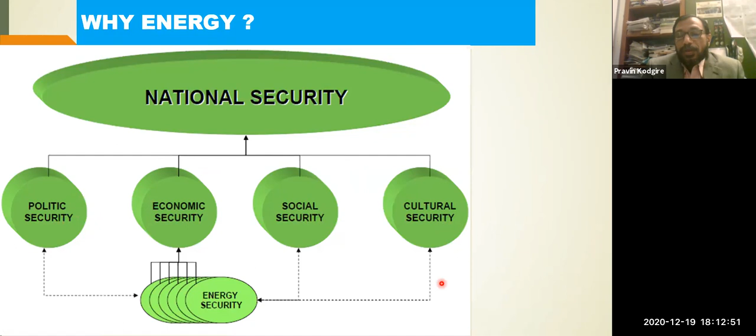We all know there is a need for energy. As engineers, we have already studied that without energy, any daily activity or instrumental activity cannot function - energy plays a crucial role, not just for the individual but in a broad sense. Today, most of us are aware that the Honorable Prime Minister is emphasizing national energy security. Energy plays a vital role in accommodating several aspects like political security, economic security, social security, and cultural security - these are all integrated or interrelated with energy security. In another sense, energy security is an indicator of Atmanirbharta or Atmanirbhar Bharat, which has been emphasized and proclaimed by the Honorable Prime Minister.

Along with that, positive progressive growth for the betterment of the nation as well as the globe, self-sustenance, self-reliance, and more importantly, sustainable development. I'm sure we all are aware what sustainable development indicates. We need to think about progress, and at the same time, we need to think about mother nature as well.

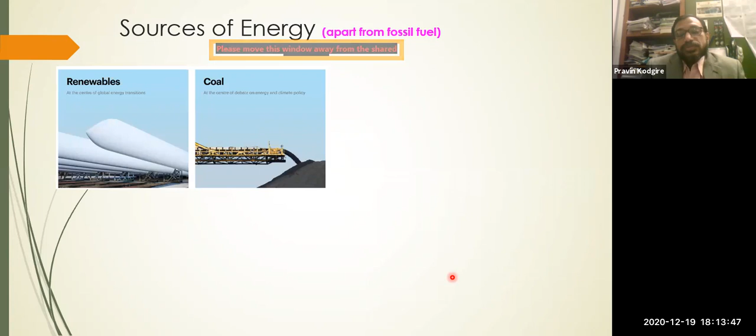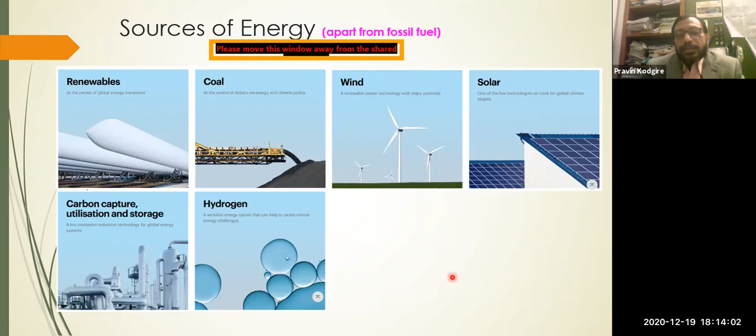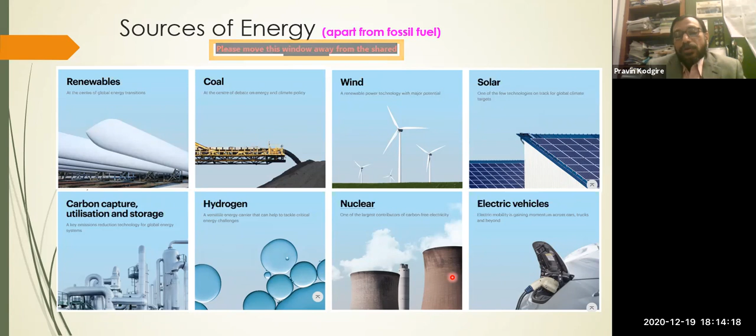Now let's look into what are the sources of energy. This is not a very new thing, but we are all aware. Here I'm focusing on the different components of energy other than fossil fuel, which is presumably considered an integral part also. Renewables, coal, wind, solar are the upcoming components. Then utilizing fractions like hydrogen, some new components of energy as well as old components, through which we basically take care of our energy needs and requirements.

Now, having understood the different sources, let's look at the current global trend and scenario in terms of energy. This gives a schematic representation from 1950 through the decades, showing how the energy scenario in terms of sources has varied. By and large we know petrol was discovered since the 50s. Prior to 1950s, coal was the major prominent source of energy, and industrialization was not so much there. But after World War II, a lot of industrialization took place, and a lot of research went into different fields, and different sources of energy came into the market.

If you look into the projection, because some projections are important down the line to the topic I'm going to present - the coal is prominent, but after 2020, by 2030, it's probably going to decline a little. But prominently, oil and biofuels at the bottom are more or less stabilized. Here I'm focusing on both oils, that is petroleum based, and renewable fuels in liquid form. And if you see here, the global energy demand is increasing, which we all know.

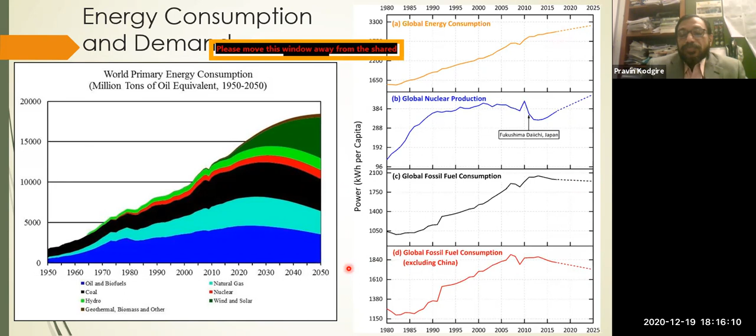The population is increasing, living standards are increasing, and the need for energy is increasing day by day. However, some components are playing a declining role in terms of their availability and utilization for future growth demands and requirements. Nonetheless, the energy sourced typically from coal or natural gas or fossil fuels doesn't come at a cheaper cost - it comes with a certain price. What is that price today?

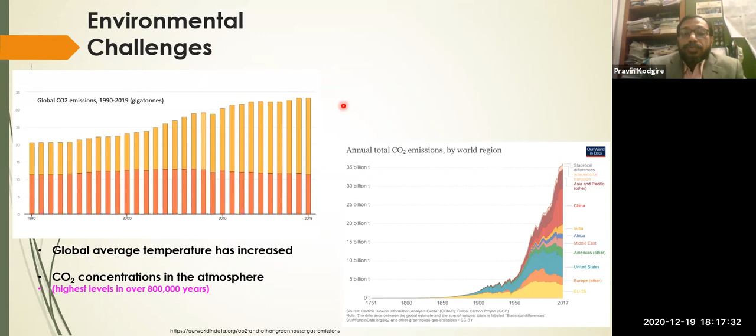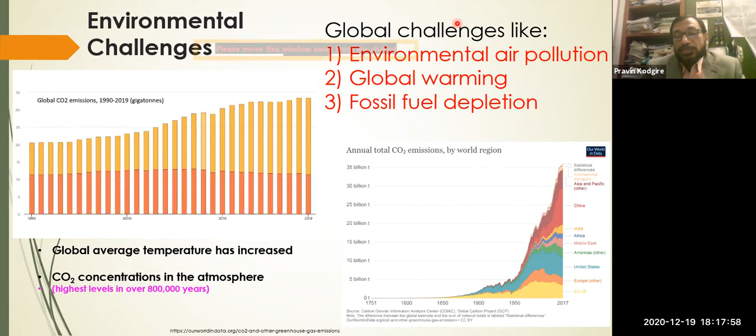Those of you residing in Delhi are more aware of the pollution you are going through. The CO2 emission or concentration is the topmost over the last 8 lakh years. Just imagine what kind of activities and environmental challenges we are putting forefront. This brings us to certain buzzwords everyone is talking about today - challenges like air pollution, global warming, fossil fuel depletion, and so on. We cannot overlook these challenges if we talk about sustainability, and we need to come up with concrete solutions if we want to sustain and survive in the future.

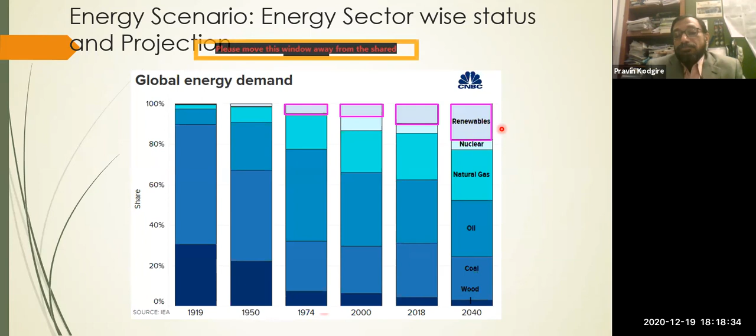Nonetheless, the quantum of energy requirement cannot be completely fulfilled by renewables, but still they are the potential players to take care of the sustainable growth point of view.

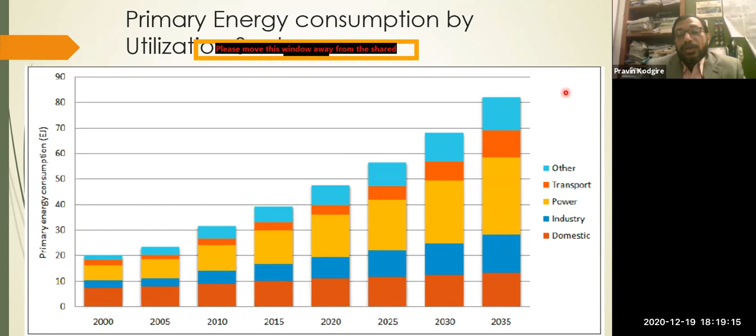So from that perspective, and in order to take care of the challenges which I specified, what is the motivation for going ahead with this theme? What are the motivations to think about this from the sustainable development or sustainable growth point of view?

We are all aware that in 2015 there was a major milestone where almost 198 countries across the globe met in Paris, and during that conference they took an oath that they are going to decrease carbon emissions by whatever means responsible.

Apart from that, with all these updated informations, the Government of India is also not running behind. They are also on the forefront and have come up with a policy about sustainable fuels or green fuels, which can be affordable and can take care of the environmental concerns and challenges.

Furthermore, as I specified in some of the previous slides, for the growth of the nation, transport or diesel consumption plays a very important role. And generally today we are getting most of our diesel from petroleum based sources.

As I already mentioned, it is projected that by 2050 most of the petroleum reserves are going to get depleted and come to a certain saturation level. Looking into the environmental concern point of view, they may not be prominently available for common people. So we need to look for something else which can cater to the common man's requirements and needs.

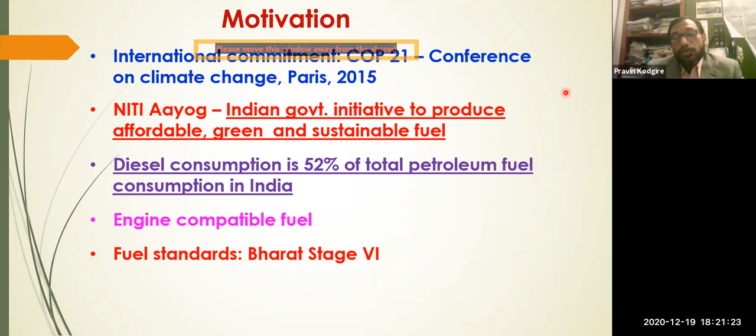In view of the global challenges we just discussed, stringent norms are being set by statutory bodies as well as government. Recently in April 2020, instead of only Bharat 4 kind of fuel specifications, we jumped to Bharat 6 stage fuels. As many of us are aware, the critical point is most parameters are the same as Bharat 4 fuel quality, but one important criterion is the sulfur content should be 10 ppm.

Being engineers, we know that to come down from a certain equilibrium to a lower equilibrium, a lot of engineering has to be done in existing systems in order to maintain specific standards and qualities. So this is also parallelly a challenge which needs to be taken care of, and for this perspective we need to look for an alternative. Is there any alternative available?

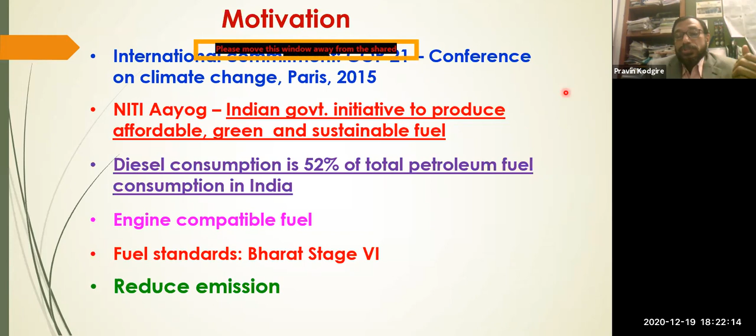Of course, reduction of emission is another motivation. So is there any alternative or solution available for these motivations or for the previous challenges? Yes, biofuel is one of the important motivations addressing all these aspects.

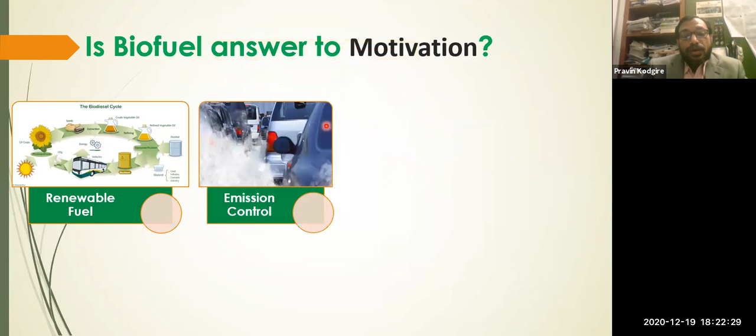Why? It is a renewable fuel. Also, it controls the emission. There are studies that show if you use petrol diesel versus biofuel - I'll specify more specifically biodiesel - there will be at least 30% less emission from the same amount of fuel burned.

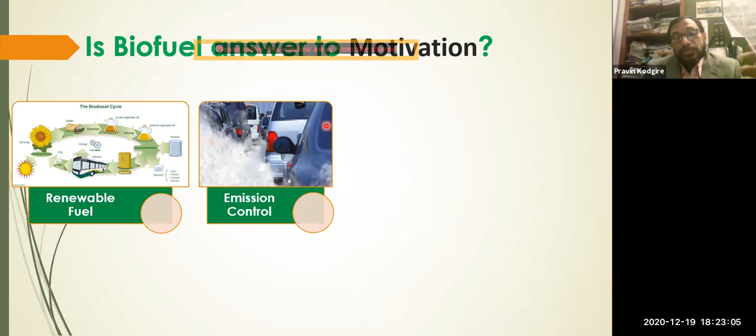Just imagine, with petrol diesel, when it gets burned and the CO2 leaves into the atmosphere, that is an open cycle - CO2 will not be captured back. Whereas with renewable biodiesel, if you burn it, the CO2 that is released will be captured back in the carbon cycle or CO2 cycle, and the overall impact on the environment can be substantially or significantly reduced.

More or less, this will lead us to energy security, and as I said, the fuel is very much compatible with existing engines up to a certain composition blended with petroleum diesel. That makes biodiesel one of the important, prominent candidates.

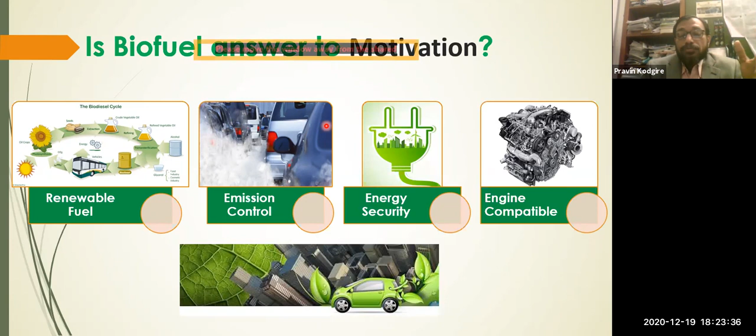Let's look into a few more facts. I won't take much time on these, I'll jump to the other topics. But these are some statistics that as Indians we should be very much aware of.

We are the fourth largest petroleum consumers, fifth largest primary energy consumers in the world, and sixth in energy demand, which is basically increasing.

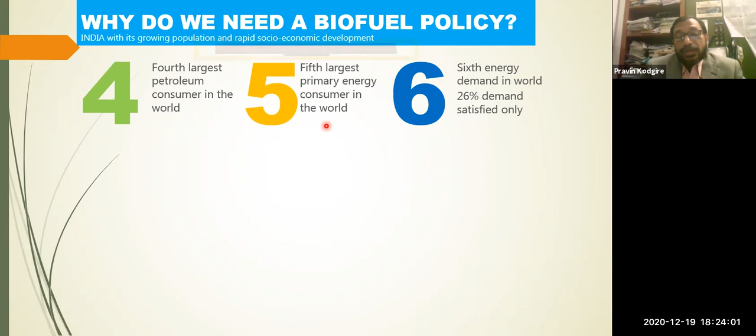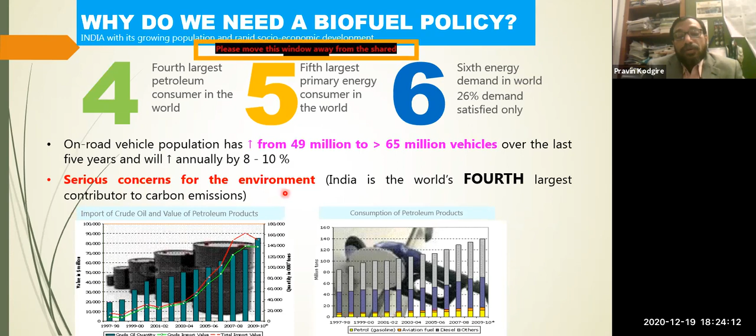As already specified, demand is increasing and we need to take into account the environmental concerns, come up with policy, and I'll touch upon some aspects to give youngsters an idea why there is tremendous potential for the biodiesel sector.

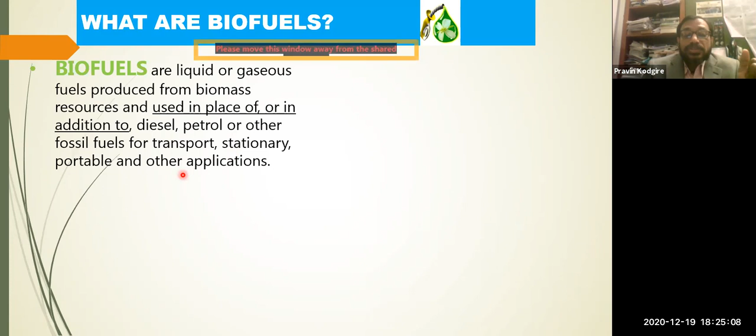So when we talk about biofuels, they can be either liquid or gaseous. Bio means plant derived, natural or renewable based. They can be used 100%, or blended with diesel or petrol, for transportation as well as stationary sets, gen sets, or other domestic or industrial applications. That's how broadly biofuels are designed.

There is a lot of research going on. Based on the type of resource used, they can be divided into first generation biofuels, called bioalcohols and biodiesel, mostly derived from vegetables or things people consume. I'll touch upon some problems associated with that.

Typically in countries like India, we have a huge population, and current agricultural production of vegetable based oils is insufficient for the people themselves. So if you go for this option, it will create a food security problem. Only developed nations like Europe, USA, Canada focus on first generation, but they are now also switching to second or third generation biofuels.

Second generation uses non-edible fuel feedstocks, and the fuels obtained from them are called second generation. Third generation is where a lot of research across the globe is going on, targeting microorganisms like algae, which contain huge amounts of fatty acid base, and can be converted into not just biodiesels but a variety of biofuels - this point will get clearer.

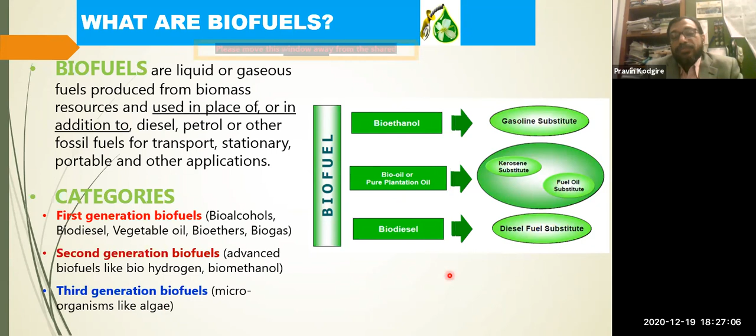When we talk about biofuel, it comprises three different components - I'll focus on this a bit more. Bioethanol is compatible with petrol, bio oils are compatible with aviation fuels or plantation oils like fuel oils or FCO, whereas biodiesel is more compatible with petrol diesel. That's how briefly one can get an idea of what biofuel means.

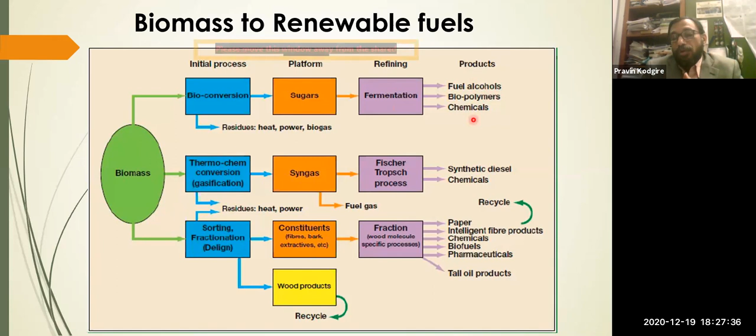Now there are different sources - each requires thorough knowledge. But briefly, there is a bioconversion route, a thermochemical conversion route that is gasification, and fractionation routes, from which by adopting different intermediate chemical transformation stages, you can get a variety of products for our daily needs.

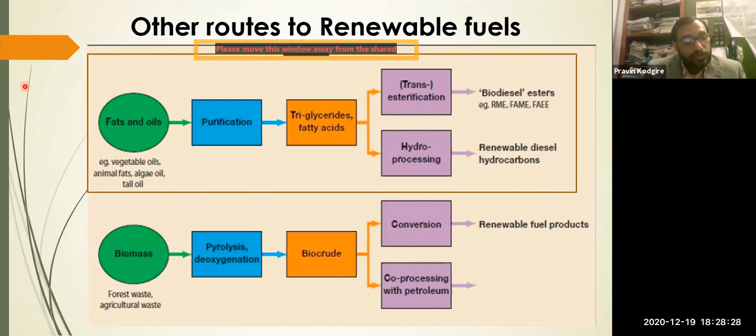There are many other routes shown here giving different types of feedstock renewable fuels, as discussed in the previous slide - that is what biodiesel or biofuels generally refer to. As I said, this will be the focus.

Now I'll quickly run through why this is important. If you look at statistics, by 2016 there was a $100 billion market, and in 2023 it is going to rise to $132 billion, and within another 5 years it is going to reach $150 to $160 billion.

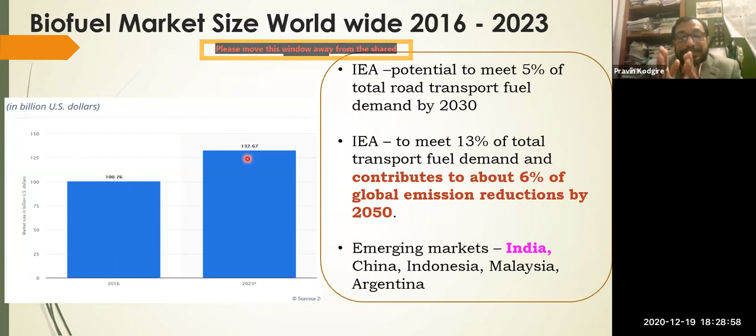Just imagine, it is gaining tremendous importance in the global arena. Why am I focusing on this? Because India's population, India's potential, India's standing in the world is going to be significant in terms of consumption as well as tackling the challenges. A lot of research is going on in this domain in India, which is at par with global standards in terms of providing solutions to energy sustainability and energy security, because India is going to play a major role.

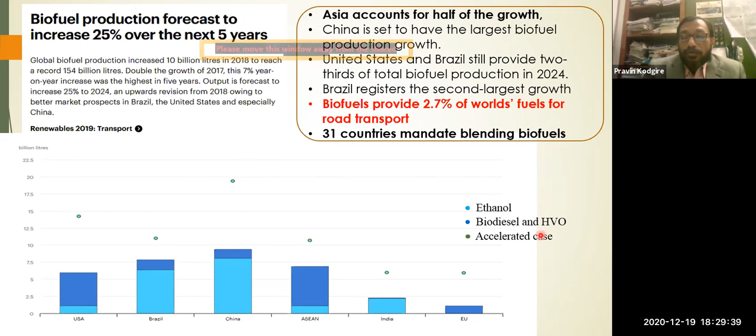That's how you can look into these numbers for the different types of biofuels which I specified. As I already said, the government came up with the policy. I won't get into many more details, but certain current issues can also be addressed, where the farmer community or agriculture community can also be benefited. The policy was initiated in 2003 but revised in 2009, 2011, and recently 2018 and 2019.

As part of 2019, it has now been made mandatory that petrol and diesel should have some fractions of bioethanol and biodiesel respectively. By 2030, the government is planning that diesel and petrol sold at fuel stations will contain 10% biodiesel blending. Now just imagine, even if we consume different feedstocks and convert them all into biodiesel...

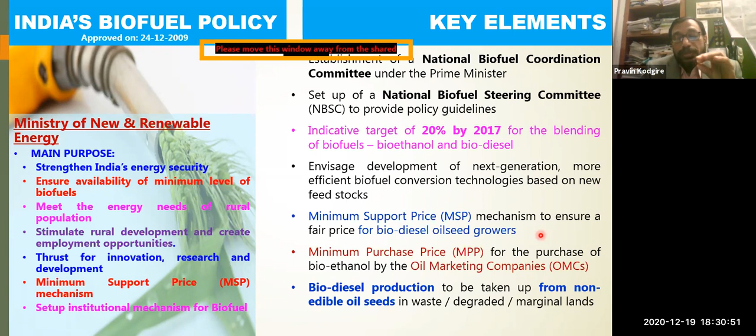India today is only able to produce 0.14% of the biodiesel blending that's possible. So to reach the target of 10%, there is plenty of opportunity available for youngsters in terms of entrepreneurship, research, and coming up with new ways to produce biodiesel.

So as I said, the policy is devised in a way that benefits these different people. If you just see, every section of the society, may it be local, national, or global, is going to get benefited. May it be industry, individuals, agricultural community, administrators, everyone is going to basically get benefited. That is the important idea.

Is there any issue? So everything is fine. Go ahead, sir, nothing wrong. Yes, Dr. Pravin, it's going good.

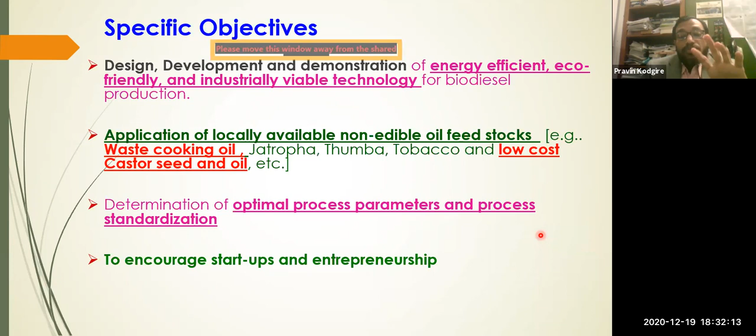So I'm going to just brief you a little bit on what we are doing in India to take care of this particular field, and what kind of activities we are doing in my university. These are the broad areas: we are designing, developing, and even demonstrating energy efficient, eco-friendly, industrially viable technologies for biodiesel production. Our focus, as already specified, is on non-edible feedstocks. In subsequent slides I'll talk about the limitations with first generation biofuels.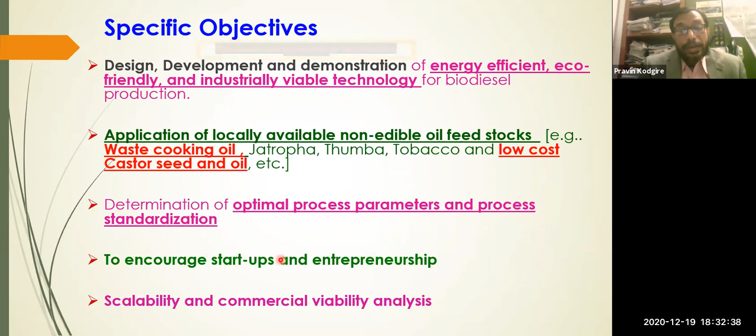Of course, when you talk about engineers, we need to do optimization of a process and process standardization. So those activities we do, and as part of the center, we come up with new ideas and train students for entrepreneurship activities. With that, let me get into the technicality of the topic.

So when I spoke about biodiesel, what kind of raw materials go into it? When you talk about biodiesels, what I require is either oils or seeds. They can be edible or non-edible, but here I have focused more on non-edible. Then there is another chemical required, that is alcohol, and one more important entity required is a catalyst.

Now let's first look into the feedstocks. These are the different feedstocks, but as I said, in India we are not focusing much on these. Most developed countries - Europe, USA, Canada, and to an extent Malaysia because they have a lot of palm oil - are focusing on edible sources. Whereas in India, these are the non-edible sources which I have focused on here.

Apart from these, these are just representative ones. There are many more situations, geographical location wise, where specific non-edible feedstocks are available. Those are basically targeted, and along with that, with the recent policy by 2018, the waste cooking oil which is generated across domestic applications as well as industrial applications can also be utilized for production of biodiesel.

So there is plenty of opportunity for something which we call today as waste, and from that waste to bring out a value addition, waste to wealth. Now this is a bit of an alien word typically, if I understand most of you are mechanical engineers, but don't get disturbed - this is basically a transesterification reaction chemistry, which I spoke about earlier, how biodiesel basically reacts.

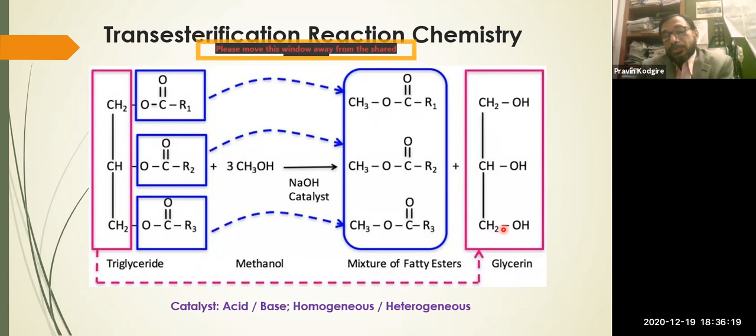And another important byproduct - many of us are using most of the cosmetic products - this glycerin plays a very important role, and it can add on the cost for your entire production of biodiesel process, like a side product although it is produced, so it can be sold, and overall a green approach can be adopted for biodiesel production.

Just to get a little more idea, some of these aspects I spoke already. Glycerol we already seen in the previous slide. This is a triglyceride, that also we have seen, but these triglycerides, depending on the different types of seeds, like non-edible seeds I just spoke about - mahua, neem oil seeds, karanja, jatropha, castor, and so forth - they contain different chemical structures.

What chemical structures? If you see, these are the chains, called long carbon chains, maybe 12 carbons, 16 carbons, 20 carbons, 22 carbons likewise, but they are attached to the other end. This is the glycerol end.

But sometimes, depending on the nature of the fluid, many times we hear don't eat too much oily stuff, because it will create cholesterol and health problems and all these things, because they contain some saturates, unsaturates. So what is that thing? These are some little insights - saturate means all the bonds are chemically single bonds.

Monounsaturated means among these single bonds, one of the bonds, the carbon-carbon bond, will have a double bond - that's how this is called unsaturated. And polyunsaturated means many carbon-carbon bonds are multiple bonds, double bonds are there. Generally these types of structures are harmful to our health or our body.

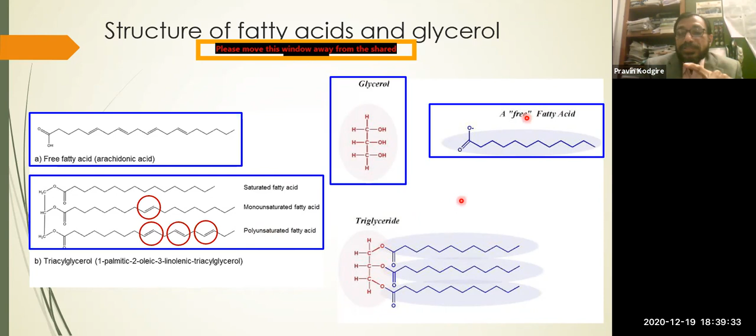As I mentioned, depending on the double bonds present, we have saturated, monounsaturated, unsaturated, and polyunsaturated types of fatty acids. Generally any acid is a combination of these different acids, so the fractions will vary, plus and minus. But this free fatty acid needs to be removed before we go for biodiesel production.

Now, having understood these things, we have to understand what techniques are available for biodiesel production. My specific topic is basically biodiesel production via process intensification. But before getting into process intensification, I would like to explain the conventional way, which is how most biodiesel production takes place today.

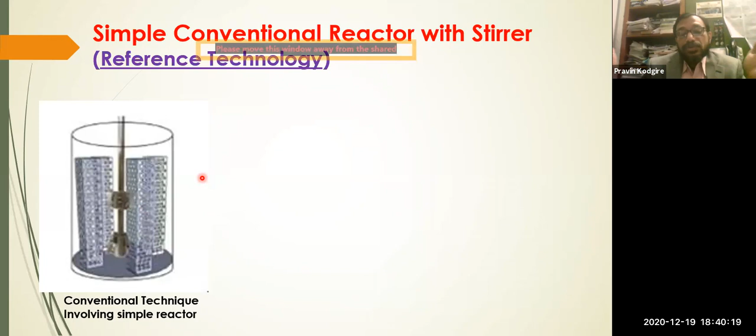This is also called the mechanical stirring method. You take the oil, add the alcohol, add the catalyst, heat it up to a particular temperature, and have a mechanical stirrer rotating at a certain speed. Then over 3 to 4 hours the reaction takes place. That is the general chemistry involved.

But this process has many limitations: higher reaction times, high energy consumption, high catalyst requirement. Once you get the final product, you have to separate biodiesel and glycerol, and a lot of water washing has to be done to get rid of the catalyst, which produces pollution and contamination. Overall, the biodiesel production yield will be relatively less, making this a relatively costly method.

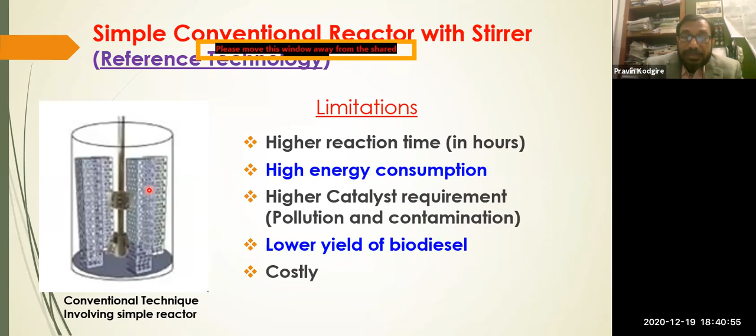So that is one of the basis, or reference, technologies. And here comes the importance of process intensification. What is process intensification? It's about improving the profitability while remaining efficient and competitive. That's process intensification in a nutshell, in just a few words.

This concept is generally studied in heat transfer contexts, where process intensification is more appealed to and understood—by changing different types of flow geometries, or changing tube dimensions and similar parameters, process intensification can be achieved.

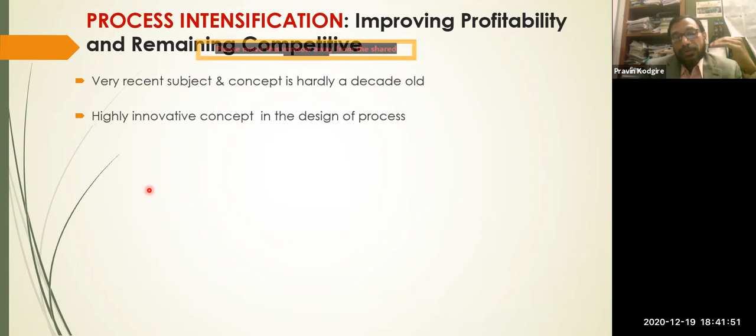Although this concept emerged in the late 20th century, today it is implemented in the chemical engineering area. It started with chemical industries, but now it has entered every field—be it environmental, civil, mechanical, chemical, or electrical. Name any field, and intensification is coming up in full fledged form.

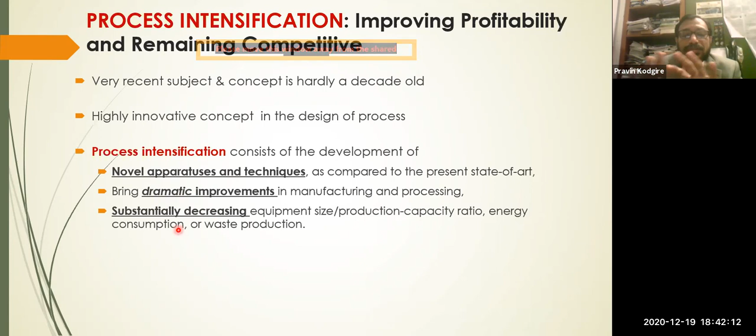So what are the benefits? It's a kind of bringing new apparatus or new techniques, or bringing dramatic improvement at the manufacturing stage, or any design modification. These are the different ways by which we can look into process intensification.

So what we can say is: any engineering development that leads to something substantially smaller, cleaner, and energy efficient. These are the important aspects from a sustainability point of view.

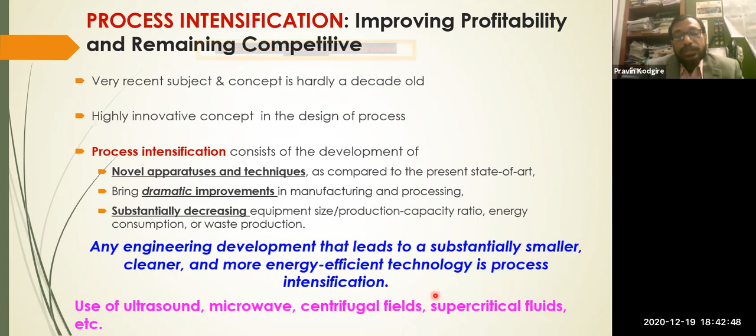That's why these days people are looking for ultrasound techniques, microwave techniques, centrifugal fields, or supercritical fluids, and so on. These are just a few examples relevant to this topic, but there are many more areas where process intensification is taking place.

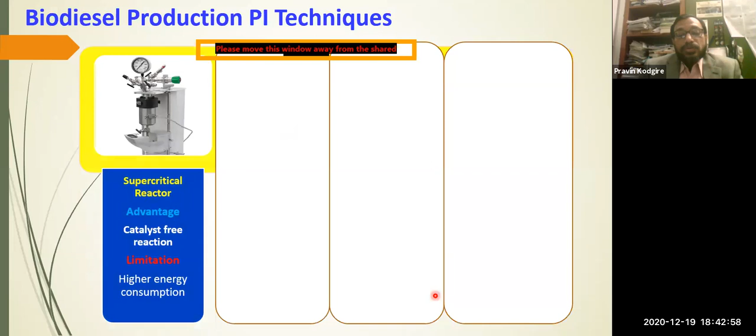Biodiesel is also a field not exempt from this. In the biodiesel area, there are supercritical reactors, ultrasonic intensification reactors, microwave reactors, as well as hydrodynamic cavitation intensification techniques. I've highlighted their advantages and disadvantages, which are not easily addressed by the reference technology, that is, mechanical stirring, which I specified earlier.

Nonetheless, all these individual technologies have their own limitations in terms of high energy consumption. Ultrasonics has heat transfer limitations, microwave has mass transfer limitations, and for certain other approaches, like the in situ approach for biodiesel production, cavitation technologies may not be so useful or important.

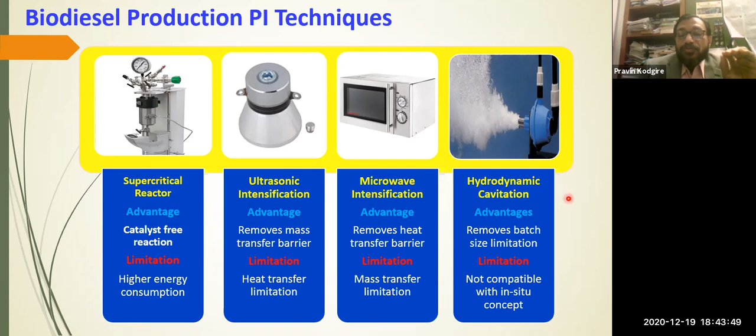So for that, although we have worked extensively on each of these individual techniques, to give a new flavor to each of you, I'm going to talk about a new concept—a hybrid technique. What does hybrid technique mean? If we know the intensification effect and the conversion or yield, we can see how much better a product we get.

So what we want is to be on this quadrant of this particular graph, and this can be achieved by doing hybridization, by putting two techniques together. So my hybrid technology here is a combination of ultrasound and microwave, or a synergic effect, simultaneous effect of microwave and ultrasound.

Previously I showed microwave has a limitation of mass transfer, and ultrasound has a limitation of heat transfer. But if I combine both techniques, I can overcome the individual limitations of each, overcoming mass transfer as well as heat transfer limitations, and increasing product efficiency. That's how I am bringing this process intensification. So where I'm expecting maybe 60-70%, I may expect 100-120%, or if I get into the topmost right quadrant, I can even achieve a 500% yield or performance of the system.

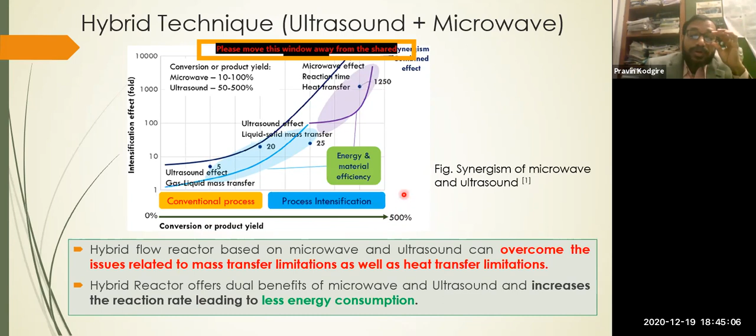So let's look into biodiesel. What is in-situ biodiesel production? I'll club this here, and depending on your background, being mostly from mechanical engineering, this study will be more helpful. As I said, biodiesel's application is mostly in the transport sector.

Although I said a lot of positives about biodiesel, in terms of taking care of CO2 emissions and so on, this biodiesel has one problem: when it goes for diesel engine combustion, NOx increases. All other emissions can probably be taken care of, but NOx is a major culprit, and most of the reason for Delhi's pollution is NOx also. Most researchers have identified that NOx is one of the major concerns when using only biodiesel. I've already spoken about how biodiesel is produced.

Now, even when you add diesel and biodiesel mixtures up to 30% concentration in diesel engines, the overall NOx is increasing. This is shown in most of the studies.

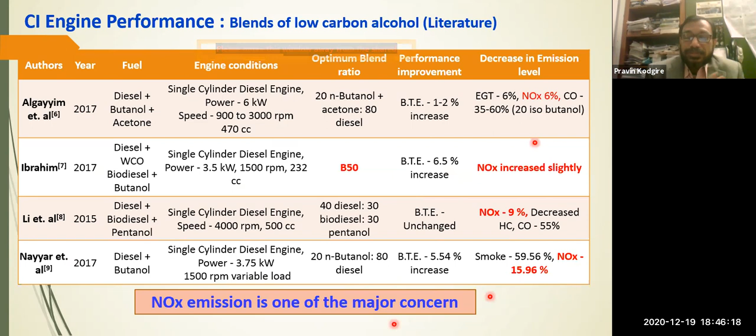Now, this is one of the problems which I'll address a little later, but prior to that I'll explain what in-situ means. Before that, I've put together two different objectives: one is I need to produce biodiesel in an energy efficient and environmentally friendly way. At the same time, whatever biodiesel I produce, if I use it in petrol diesel, I need to get rid of the NOx emission. So how is it done?

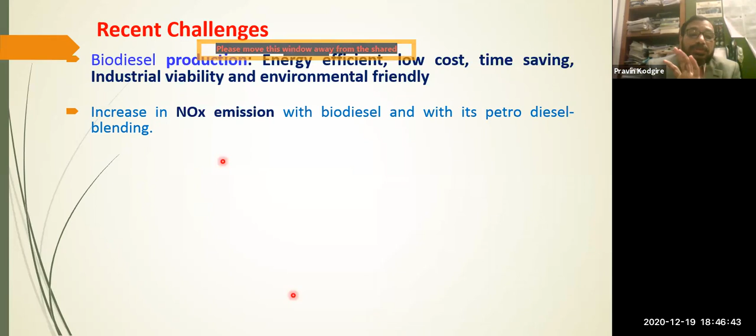For that we have applied this process intensification technique, applied this in-situ approach, and come up with a new concept. Based on that, we have recently published a paper, details of which I'll give shortly. Those who are interested may look into that. It's a very nice, interesting study which is recently published.

So for that, what we did is we added butanol. Now why butanol? Like ethanol, which is bio-based, because most of the sugar cane leftover after extraction can be converted into bioethanol. Brazil is the topmost country today - they have petrol pumps where vehicles are using 100% ethanol as fuel. In India also we are using it, but not to the great extent Brazil is doing.

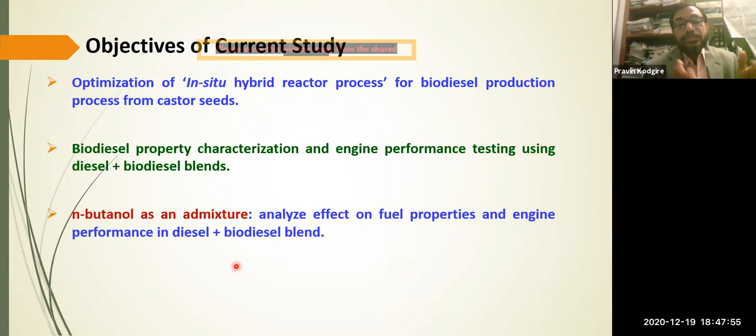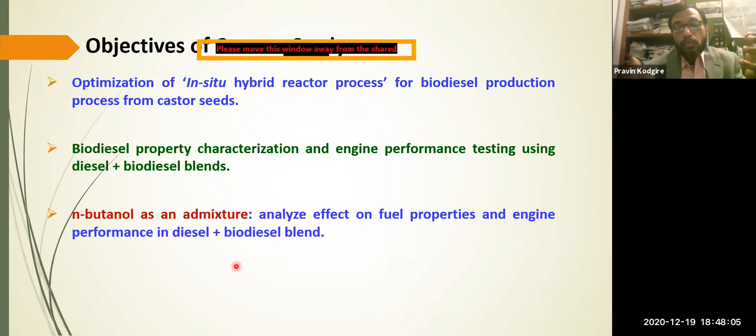Similarly, N-butanol or this butanol can be obtained from a green route, so we don't have to depend on petroleum-based products for getting this butanol. Otherwise, this is a product of the petrochemical industry, generally obtained from petroleum-based sources. But there are green or renewable ways by which you can get biobutanol. So what you are doing is making a greener and cleaner fuel.

So what does in-situ mean? Earlier I said you have to take oil. Now here I'm not going to take oil, because for oil you have to crush the seeds, and the majority of energy is applied in crushing the seeds to get the oil, which is then transesterified to get biodiesel. What we are doing is using seeds as-is, reducing 70% of the energy for oil extraction. This is the in-situ concept: for transesterification, it's a simultaneous extraction and reaction. The oil is removed from the seeds within the system itself, and that oil simultaneously reacts with the alcohol in presence of a catalyst.

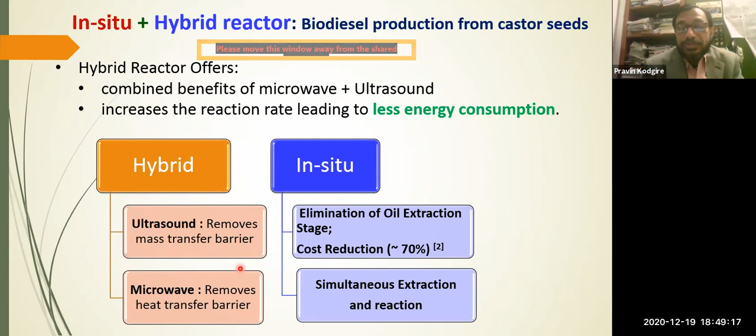So I'm producing biodiesel directly from the seeds. For the process, I already mentioned the use of a hybrid approach, ultrasound and microwave. This removes the mass transfer and heat transfer barriers. Otherwise, if I only use ultrasound or microwave compared to mechanical stirring, they have their own individual limitations. That limitation also I'm getting over.

Now we as engineers are aware, but I'll give a quick snapshot of what ultrasonication involves. Continuous ultrasonication waves, from 20 kilohertz up to 40 kilohertz range, create cavitation effects, and then bubble formation starts in the liquid present, or the gases entrapped in it. Those gases or bubbles start growing, and after a certain micron range of bubble growth, it explodes. This explosion is so vigorous and fast that at the molecular or microscopic level, 5000 K temperature rises and almost 1000 bar pressure is generated.

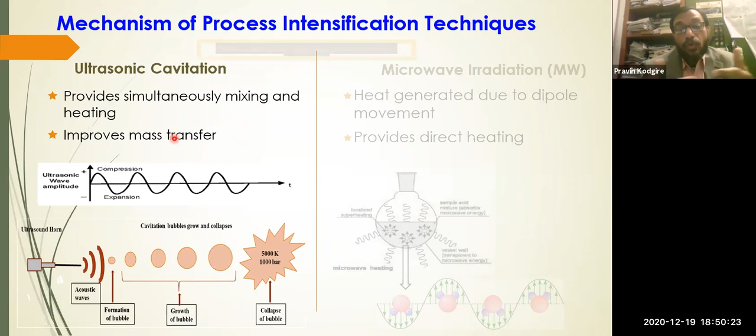This basically helps me improve the mass transfer, because this reaction is between viscous substances, and unless the alcohol and the acids or fatty acids or oils interact with each other, the biodiesel will not produce. For that, mixing or mass transfer is important. So that I am achieving by cavitation.

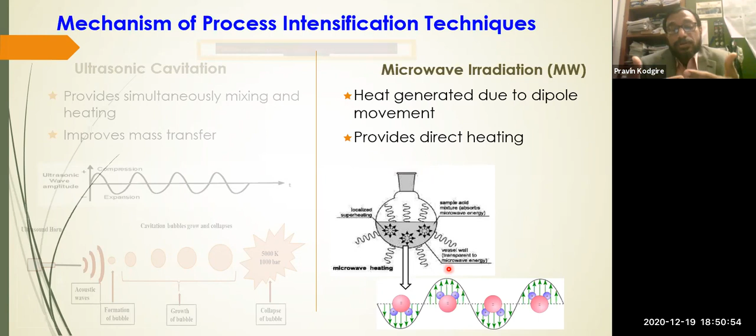Whereas at the same time, this reaction requires heat. So by this bombarding and by giving polarized heating at the molecular level, the heating is also directly given rather than through an indirect heating source, through coils, or by heating up the solution. This microwave provides the necessary energy for carrying out the reactions, because both things are taking place simultaneously in the system. That helps me better the process.

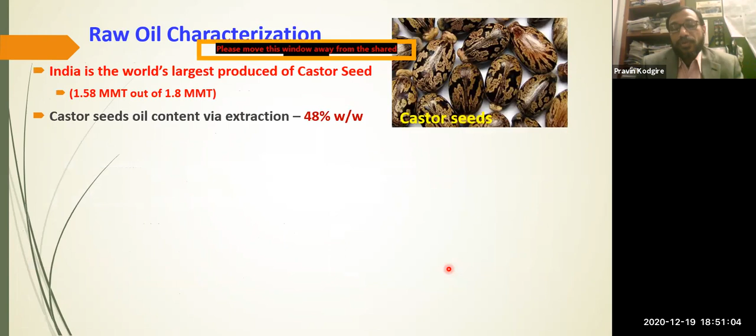I'll not get into much detail now. You have to do the characterization of the raw oil or raw material. Here for the in situ approach, we have used castor seeds. This is another non-edible feedstock. Importantly, India, and in India Gujarat, is the topmost producer of castor seeds, where out of global 1.8 million metric tons production, India produces 1.58 million metric tons.

And out of that 1.58 million metric tons, 1.42 million metric tons is produced in Gujarat. So that was a surplus product, and most of it is just available and sold as is, with no cost. So to bring cost value to this particular product, we have chosen castor seeds as one of the feedstocks.

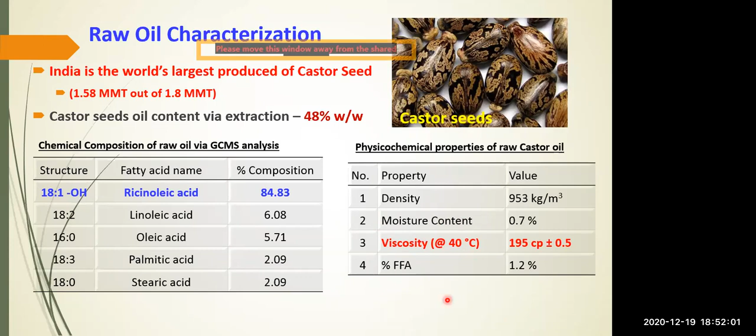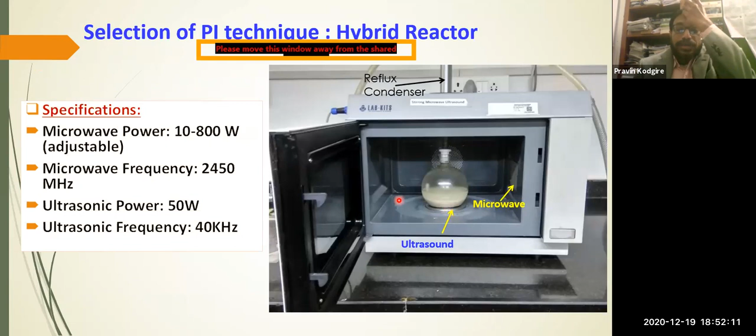There are certain properties of this feedstock which need to be specified, where earlier I mentioned it should not have free fatty acids, so on and so forth. To estimate those things and get certain parameters known for better reaction conditions, some raw material characterization is done. This is a hybrid reactor, where from the bottom ultrasound and from the sides microwaves were used for the reaction.

I'll quickly run through the process of how we produce the biodiesel. We got the seeds, they were ground for 30 seconds to get a particular particle size. Then the moisture was removed, and in the paste, alcohol is added and catalyst is added. The solution will look like something like this. The reaction is carried out in the hybrid reactor which was shown.

Then, as I already specified, biodiesel and glycerol are produced and they are separated out. Here a little extra alcohol has to be added, that alcohol is removed, and then biodiesel, glycerol, and traces of unreacted methanol are all removed.

This biodiesel will look something like this, and if you look at conventional diesel, the appearance looks more or less the same, with a little yellowish tinge that may vary. This product was characterized for density, viscosity, calorific value, flash point, residues, and all these things.

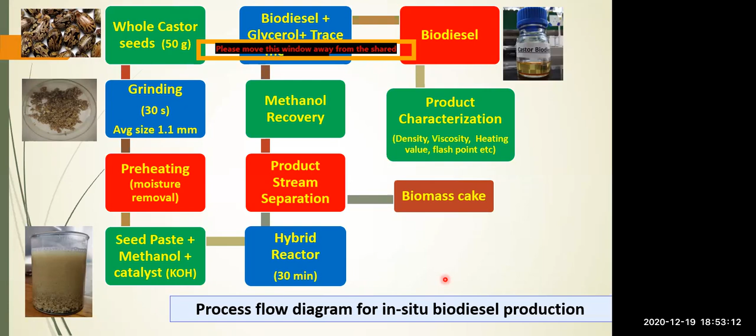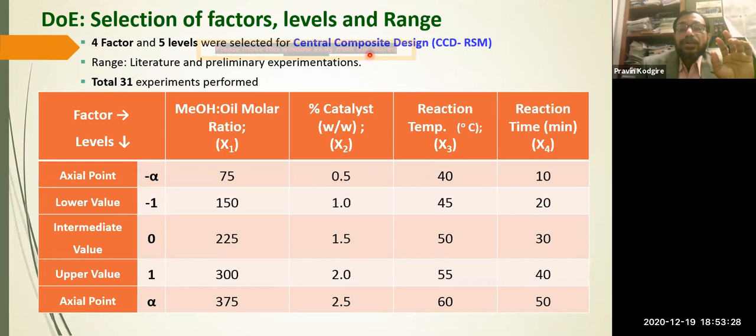So likewise, this process went for biodiesel production from the in situ process. I'll not get into detail again, as already specified, we did the process optimization using RSM statistical methods and different analyses. We used the central composite design method and tried to optimize based on the methanol to oil molar ratio, catalyst percentage, reaction time, reaction temperature, and so on, with different ranges given here.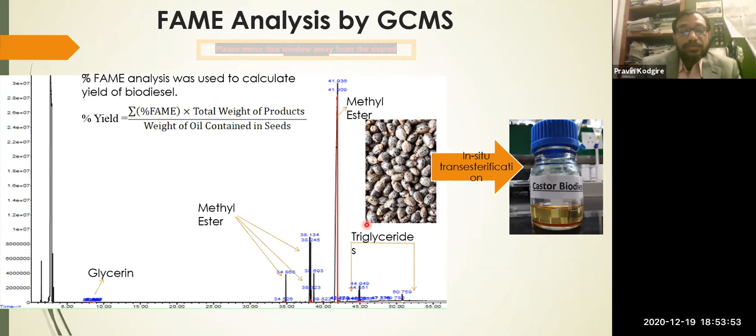That was thoroughly established, and some other properties which I mentioned were estimated. This is something important: almost 94% of oil was fruitfully converted under these different reaction conditions.

It may look a little odd to some of you, but this is the first kind of study we published, somewhere in 2018, across the entire globe. You can say we were the first to report the in situ approach for biodiesel production.

Why? Let me give some statistics here. We already spoke about the techniques we are developing being energy efficient. There are three columns: one is only mechanical stirring, the conventional process; then there was a reported study in literature using mechanical but in situ approach; and then the method which we have adopted. If you look at energy input, our system was 80, whereas the literature was talking about 240 energy units.

The batch size was 20 grams, and these are mechanical studies only, where almost both studies are giving the same amount of product, but almost 3 times less energy is used by the hybrid approach, more or less.

Another important statistic: it's 3 to 5 times more energy efficient per kg of biodiesel production. If I get 1 kg biodiesel by conventional mechanical study, I need 37 kilowatt-hour energy, whereas by hybrid technology, I only require 7 kilowatt-hour per kg of biodiesel production. These techniques are scalable, with certain challenges, but that's how the biodiesel was produced and tested for different properties.

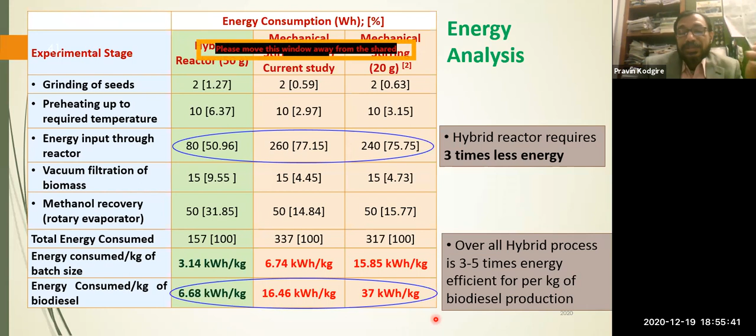I'll quickly look into the other studies now.

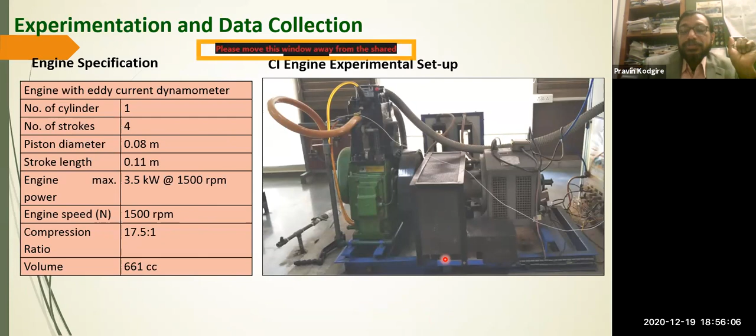As mechanical engineers, you're all experts on engine specifications. We used a single cylinder, 4-stroke diesel engine, Kirloskar made. These are some different specifications we used for this single stage, single cylinder, 4-stroke engine. I won't get into many details of this.

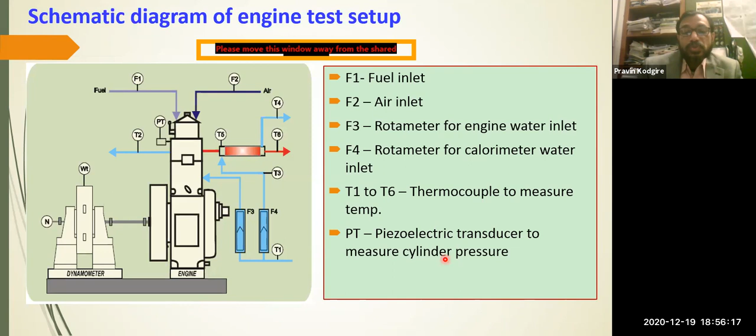This is a typical setup. We measured different parameters: speed, rotations, RPM, and exhaust emissions, and so forth. Based on that, we did the blending.

B0 means 100% petrol diesel, and B5, B10 are different fractions of biodiesel blended with petrol diesel. We did the conventional study with only biodiesel obtained from the in situ study, and the petrol diesel available in the market. What we observed: CO and unburnt hydrocarbon emissions both decreased when we increased the biodiesel blending.

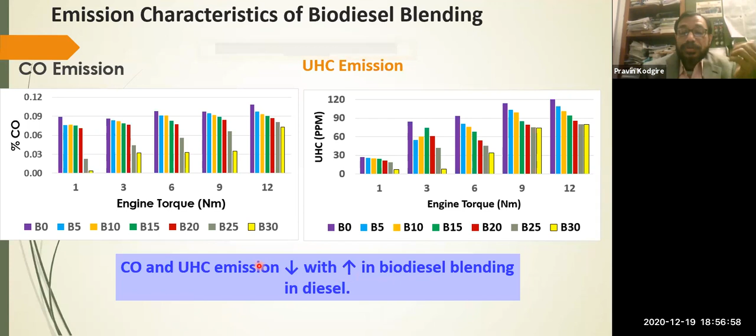And that's what I said -- most other emissions are reduced when you add biodiesel, making it more useful for controlling pollution. But we observed that when we increase the biodiesel blending, NOx emission keeps on increasing. That was one of the important challenging tasks for us -- we took care of CO and other emissions, but how to take care of NOx?

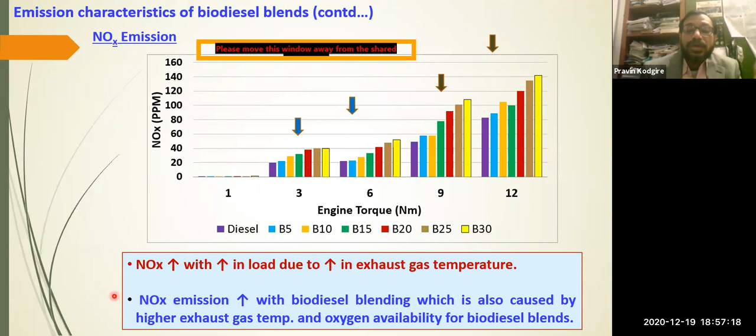For that, we added butanol in different fractions. We only used up to 30% blending, since existing CI engines are compatible with 30% blending. If you add more than 30% biodiesel into petrol diesel, you need engine modification, and we didn't want to get into those critical things. So we limited ourselves within 30%, with a maximum of three fractions totaling 100%: diesel, biodiesel, and butanol, which we added into the system.

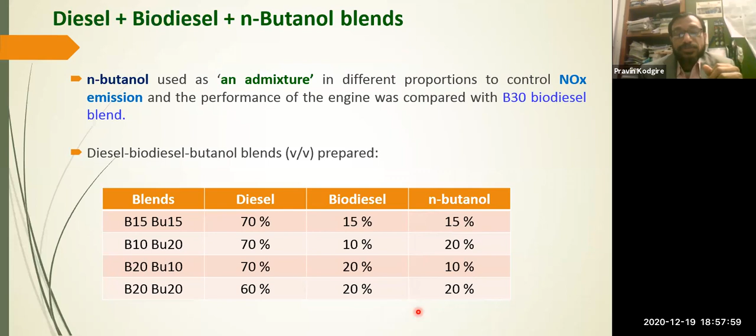We varied the 30% into fractions of 15-15, 10-20, 20-10, and we already had neat diesel results with us. For all these fractions, we again estimated the different important fuel properties, and they were all at par. Compared to only neat biodiesel, most of the blended fuels have calorific values close to diesel. But if you increase the biodiesel fraction a little, the calorific value decreases slightly, because biodiesel itself has a relatively lower calorific value. But they fall within ASTM standards, so it can easily be used as engine fuel.

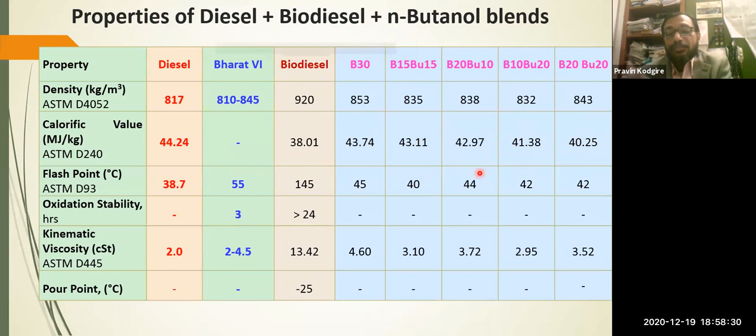Based on that, when we did the studies, we observed results across different engine loads. These tests were done for brake thermal efficiency and brake specific fuel consumption studies, and so on and so forth.

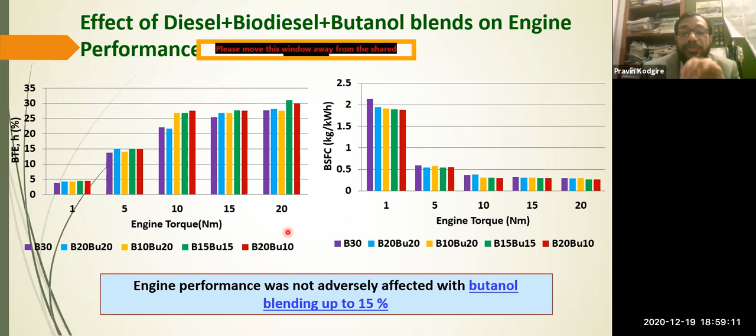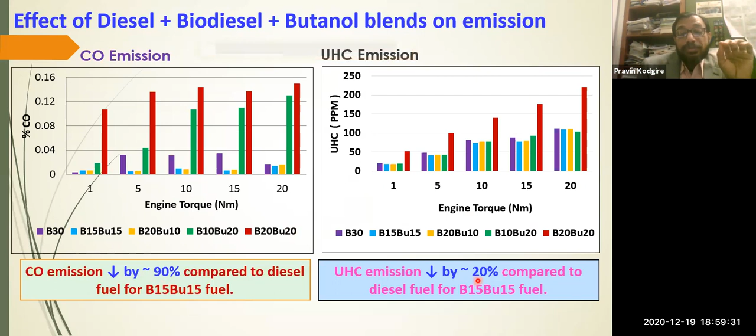What we observed again, by addition of 15% butanol, 15% biodiesel, and remaining 70% diesel, CO emission was reduced by 90%, whereas unburned hydrocarbon emission reduced by almost 20%. Interestingly, this study, as I mentioned, we have recently published in this particular reference. Many of those who are interested, if you can read. So almost 50% NOx reduction was achieved with very better and smooth engine performance, basically.

And that's how the process intensification approach as well as green approach was adopted. And as I already said, the biodiesel is definitely going to contribute in terms of energy sustainability, because we are slowly getting rid of our dependence on petroleum-based products towards renewable-based products. Apart from solar, wind, and all these things, biodiesel is going to play an important role, because the transport sector is going to be there.

Petrol-based diesel will be available, but it will become stagnant for power applications by 2040 or 2050. But most of the automobiles running on the roads, for that the biodiesel will be one of the alternatives. Although there are concerns that by 2030 or after, most vehicles will be electrically driven, but that is a really ambitious goal, practically impossible to achieve. Most four-wheeler vehicles, cement industries, power industries, or the automobile sector require diesel, and that's where biodiesel is going to play an important role.

And such a unique approach where blending of a third admixture can definitely take care of the environmental concerns and take care of the energy sustainability, basically.

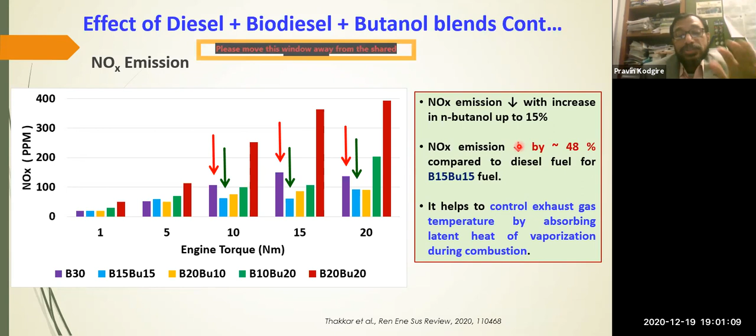So these are some of the summary of the work which I just spoke to you all: that the biodiesel by optimization was produced, and when we just add only biodiesel, NOx was increased, which was taken care of by adding the admixture butanol, and 50% NOx was removed with a 15% butanol as well as 15% biodiesel into a 70% diesel combination of the mixture.

And overall, biodiesel which was produced by the hybrid process was found to be 3 to 5 times more energy efficient compared to the mechanical process. And this in-situ process is now being looked at as a very promising approach at the industry level. A lot of pilot scale studies are going on to bring this type of technology into the market.

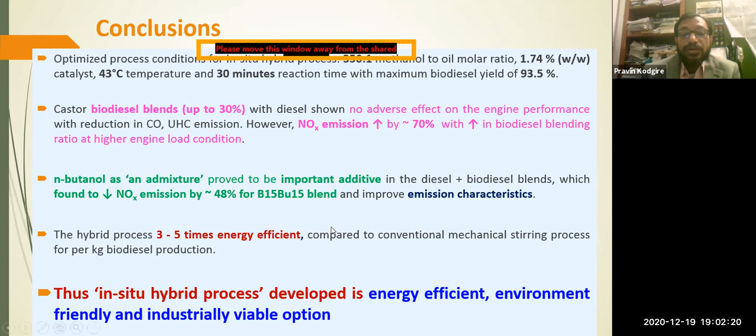Yeah, Professor Pravin, I have a couple of questions. Yes, sir. My name is Anil Kaul. I was into automotive and currently into consultancy. First question to you would be: what is the scope of commercialization looking forward using this hybrid of petrodiesel, biodiesel, and butanol? Have you done any study on how quickly it can get commercialized?

That's question number one. Yeah, as sir mentioned, we have just recently published and we are now approaching the competent authorities in terms of bringing out the novelty of our research. What I look at prominently as one of the deterring factors could be the butanol, because if you look into the cost of butanol, it is not so easily put into use. But if you look into the long-term point of view, which I was focusing on, and which every one of us needs to focus on, maybe not now but at a certain later stage: if you talk about the environment, if we are not going to take care of our environment—and recently we are experiencing harshness in the weather patterns and seasons and so on—somewhere we have to take care of that. Maybe sometimes it will cost a little to our pockets, but these types of approaches, not only butanol, this is one of the prominent approaches where the fuel is very compatible with both biodiesel as well as petrodiesel.